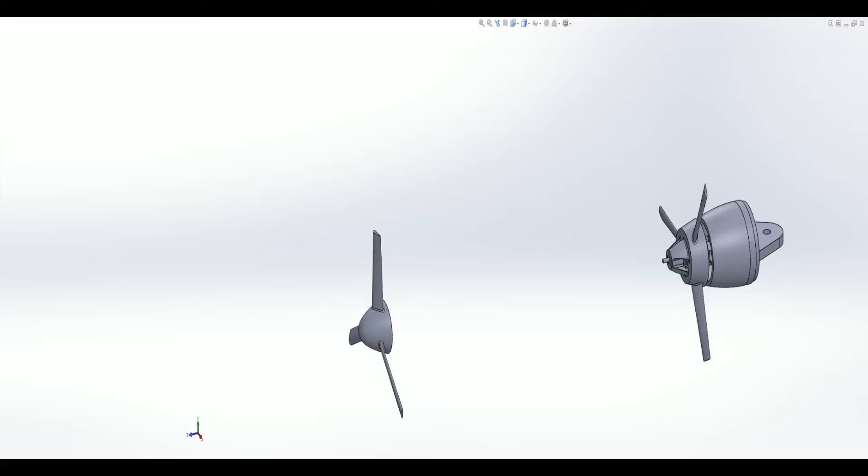What I want to share with you is my contra-rotating propeller system for RC aircraft. It is designed to eliminate torque roll and increase the thrust of an aircraft without increasing drag. Two propeller blades, shown here and here, are spinning in opposite directions. This should counter the unbalanced torque that aircraft propellers create when they get up to speed.

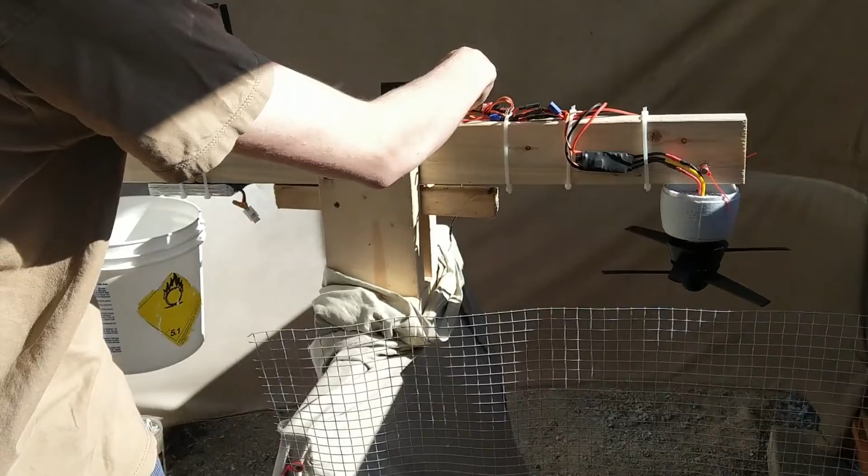The motors are inline and one is driven by a long shaft, shown here. The other is directly connected to the rear spinner. The motors run off the same throttle control, so they'll always be running at the same speed. Putting the motors inline is better for aerodynamics because you'll get two engines with the same frontal area as one.

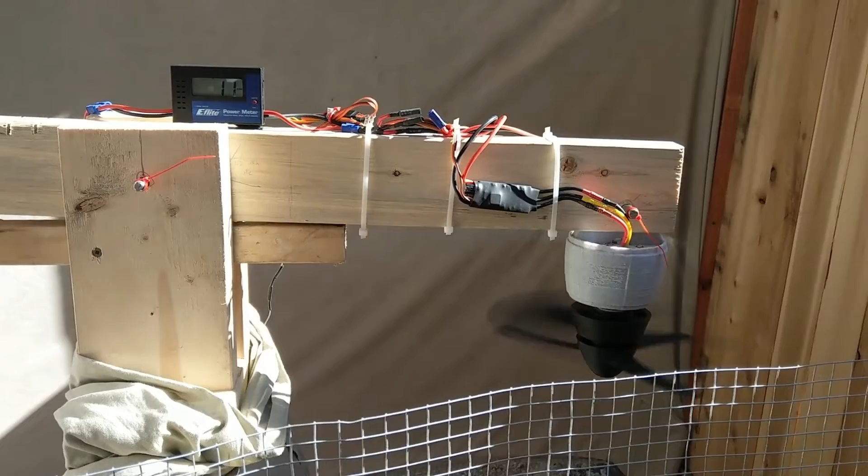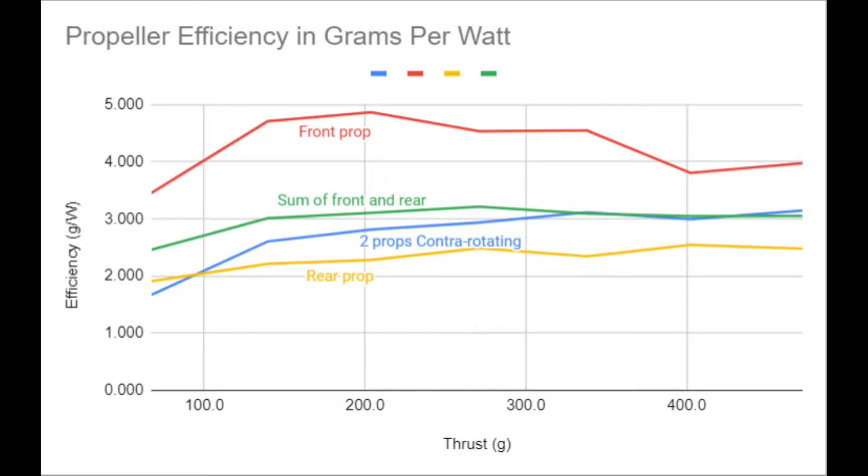I tested thrust versus power consumption on a simple balance beam test rig, shown here, and we found that at lower speed the contra-rotating prop was inefficient, but at higher speeds it was actually similar to the two props operating independently. This here is thrust versus power consumption of the motors. The contra-rotating prop gets more efficient compared to the props operating independently as the engines get more powerful.

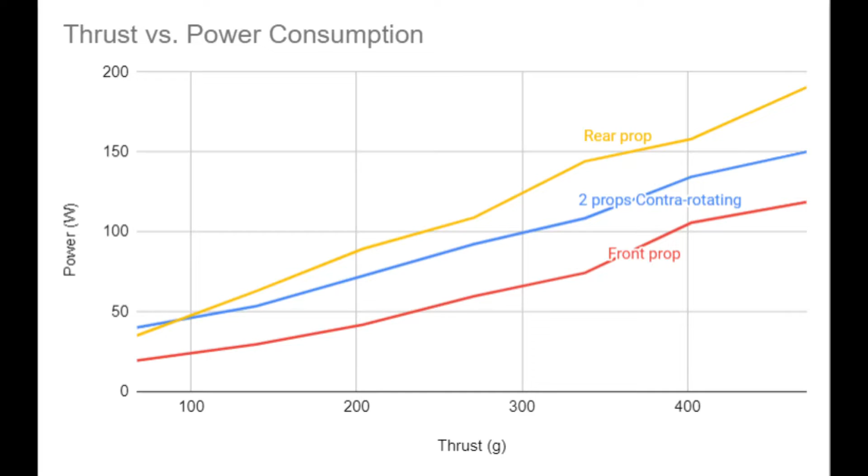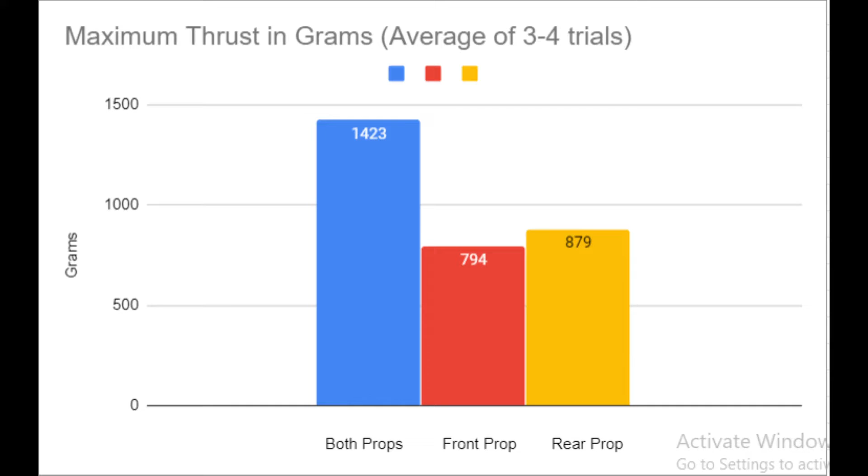And you can't see this on the graph, but it actually provides a maximum thrust of almost 2 times that of a single prop. This graph shows the maximum thrust of each of the setups, both props contra-rotating, only the front prop and only the rear prop, averaged over 3 to 4 trials each. It shows that the contra-rotating prop is able to produce slightly less than the front prop and rear prop combined when acting alone.

Energy can't come from nowhere, so unfortunately there were some losses while using the contra-rotating propeller. The contra-rotating propeller was only able to create 85% of the thrust compared to the two propellers operating independently, but it only consumed 89% of the power. This means that it achieved a 96% efficiency, which isn't that bad considering the gains in aerodynamics and size.

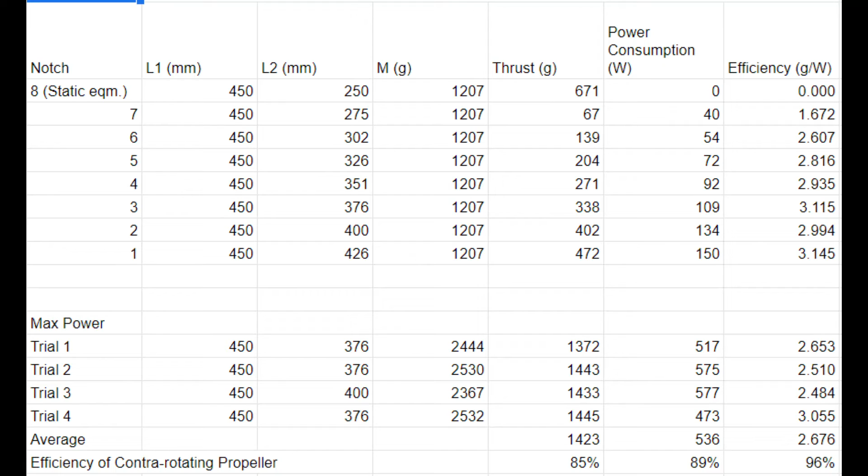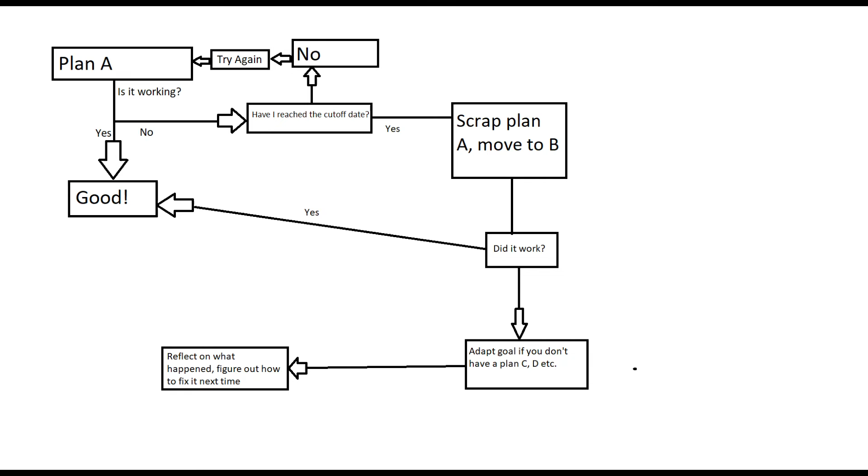My favorite part about this project experience was getting to combine my interest in aviation with a school project. Something I learned in this project was the importance of preparing and having a plan B before you start the project itself. I had issues with my 3D printer and was switching to a different brand of filament, something I initially thought would be a non-issue that really bogged the project down.

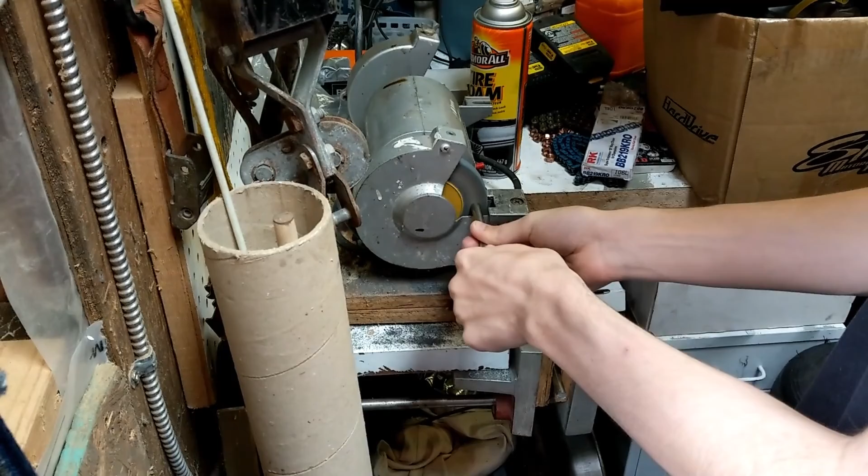In the end, I still managed to pull through with the other skills that I learned in the project, related to machining and the SolidWorks CAD system, and finally spreadsheets. Next for this project is building the actual aircraft that the engine is for. For now, here's some footage of the final tests.